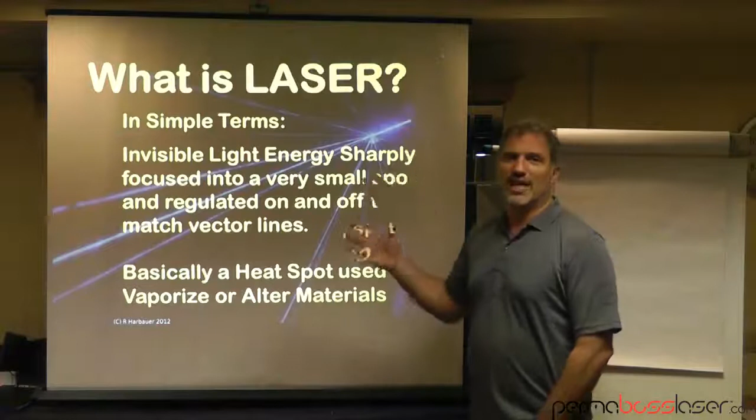In simple terms, laser is an invisible light energy that's focused and concentrated, and when it hits a surface, the energy is dissipated. It always follows vector lines—whatever you create in vectors is what it follows. For those new to the industry, vectors are the outlines, the shape of absolutely anything.

You can think of it as essentially a heat spot where you're focusing something tiny. The best example is if you ever took a magnifying glass and used the sun to focus on a newspaper, or some of you focused on ants—there's got to be one in the crowd who really burned a lot of ants.

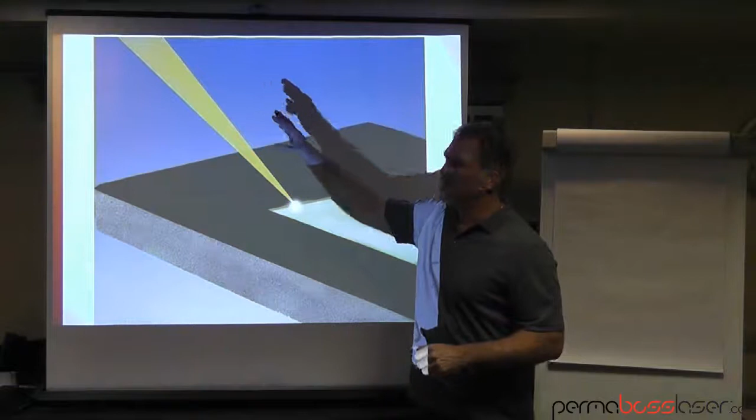Think of the beam—laser means light amplified, stimulated emitted radiation. The light coming from the ceiling or a projector is expanding out, but laser light is projected to be narrow, and then the lens you put it through makes it very sharp. When that light energy hits a surface, it essentially vaporizes it or makes it disappear.

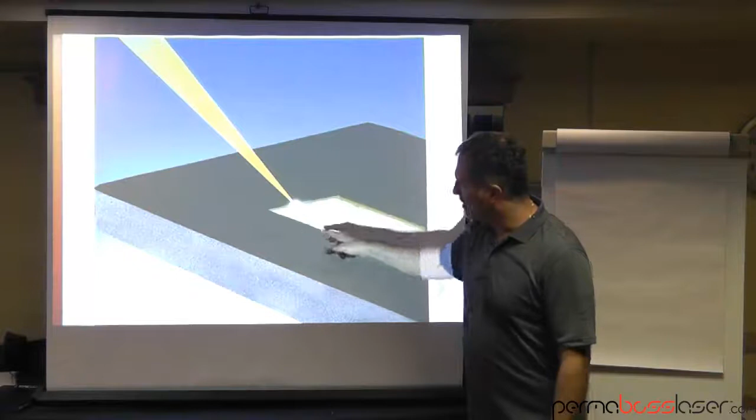In this case, you could be engraving and cutting out a shape, or taking off a surface layer. If it's something sensitive like textile, you burn right through it.

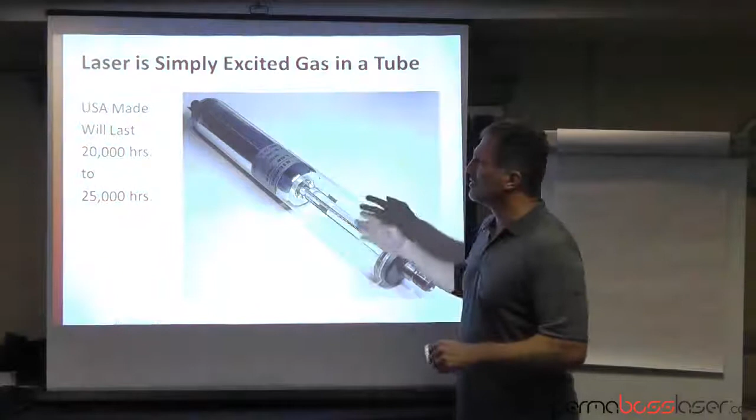If you want a visualization, think of a fluorescent tube in the ceiling light—laser is created a similar way, it's a type of gas. CO2 is the most common laser used for cutting in the textile industry.

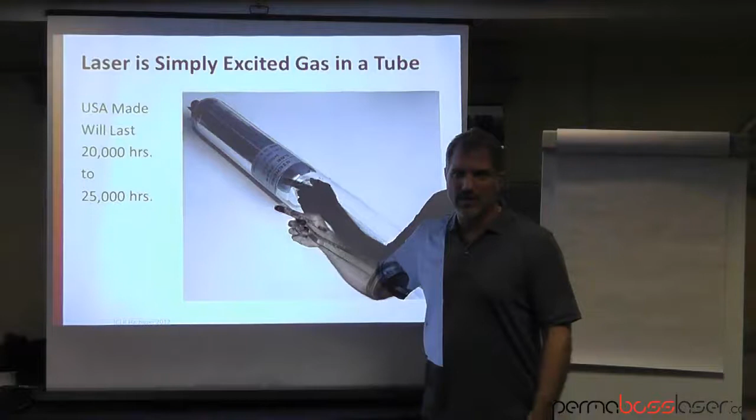If you buy a USA-made one, I don't know too many others in the world—the top ones, even in Europe, are being purchased out of the USA. They will last 20,000 to 25,000 hours.

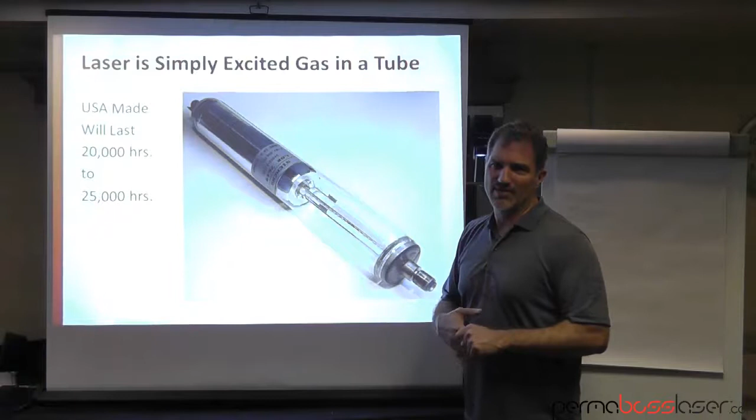In a textile-related business, that's somewhere between 4 and 7 years on average, because you might be zapping it for 2 seconds or 12 seconds times 12 pieces or 100 pieces. So it's the time the laser is on that you count as the time it's used.

In general, top quality lasers don't just die. The ones made in Asia are very inconsistent—the power fluctuation is very different, and they just die quickly and you have to replace them. Here, they're a lot more expensive, but they last a lot longer. They don't generally die, but they will fade away. So when you hit that 20,000 to 25,000 hour mark, you have to use more power, more time to get the same effect.

The three predominant laser makers in the United States and around the world, in no particular order, are Universal, out of Arizona; Coherent, which I believe is in the northeast of the United States; and Synrad, in Washington State.

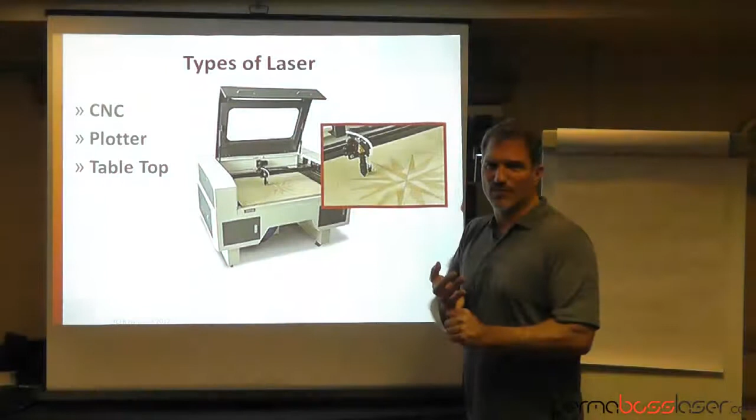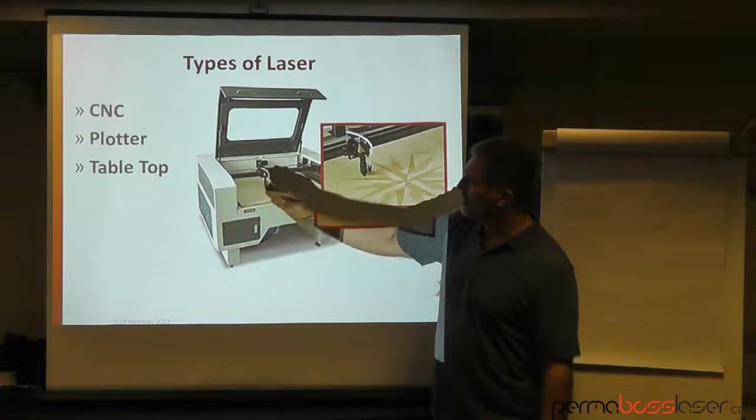The types of laser that are most common are CNC, which stands for computer numerically controlled plotter laser, which is a table moving along X and Y axes, also known as the tabletop. Here's a close-up—somewhere down here is the laser tube, and the laser light is reflected with mirrors up into this area called the gantry, and that device moves left and right and back and forth, which is the X and Y axes.

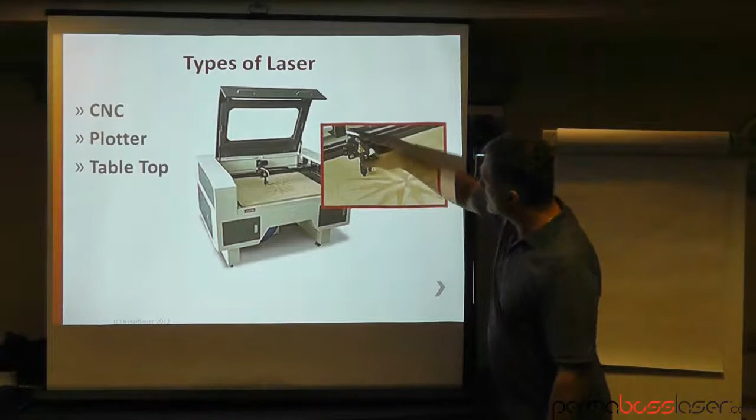Up close there's some sort of system to pump air to push the smoke away from the nozzle or lens so it doesn't coat it or cake it up, and then it's sucked away somewhere underneath on the sides, etc. This physical device moves.

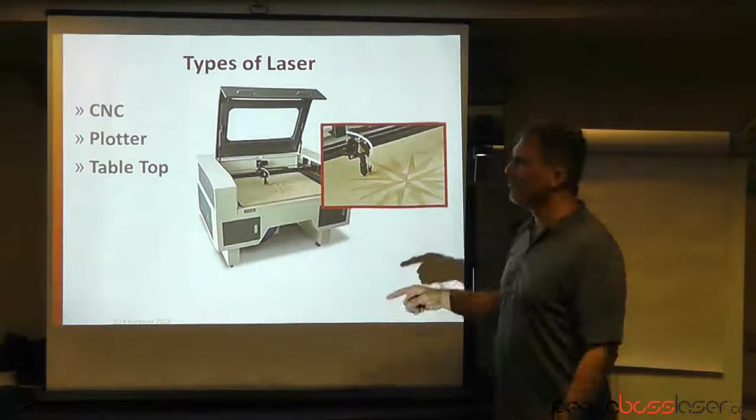The problem with some lasers—and I'm not being selective on any brand, but I hear it all the time at the shows—is that on a plotter type laser, quite often the further away you go from the source, the weaker the laser can be.

That should be like a design defect or a quality issue with mirrors and the quality of the laser beam. But in general, if it's a very big laser, the furthest extremity from wherever it's coming out is an issue because it's not as strong as on the right-hand side.

Here you see some sort of honeycomb type grill, and in general the air wants to be sucked down. One problem is if you have thick material, like wood, the smoke can't get around and hits the lens first, and that lens gets caked up. Think of yourself cooking eggs, and then cooking eggs again and again without ever cleaning the pan. Then you're cooking the cooked stuff, and that's what happens here.

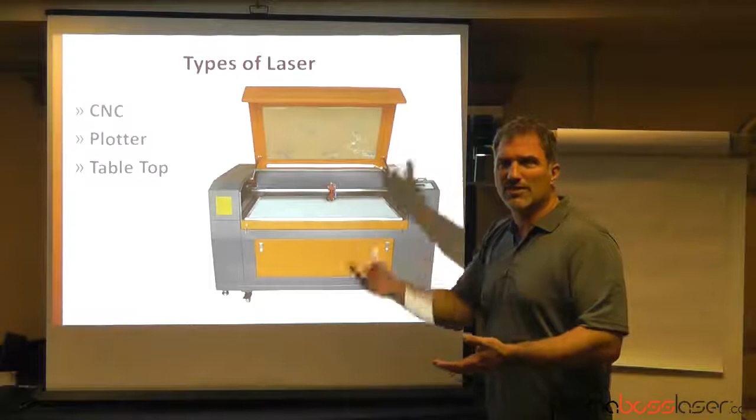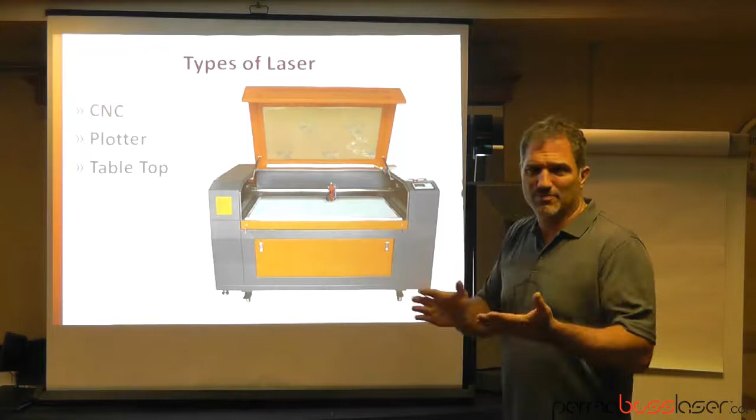This lens, often the size of a pencil eraser, is very small. The distance it is from the surface is maybe half an inch, and that gets plugged up. When that happens, you lose energy because it's being absorbed by the lens instead of the product, so the laser's effectiveness is reduced. Eventually you heat up the lens to the point where it can break or fracture, or it gets so full of cake from the burning that it can't be cleaned and has to be replaced.

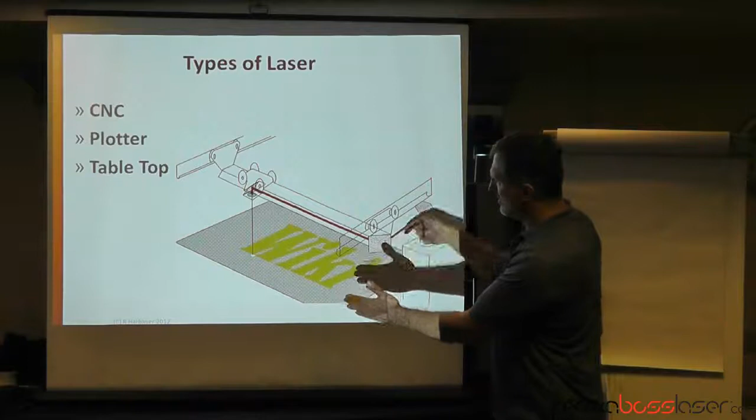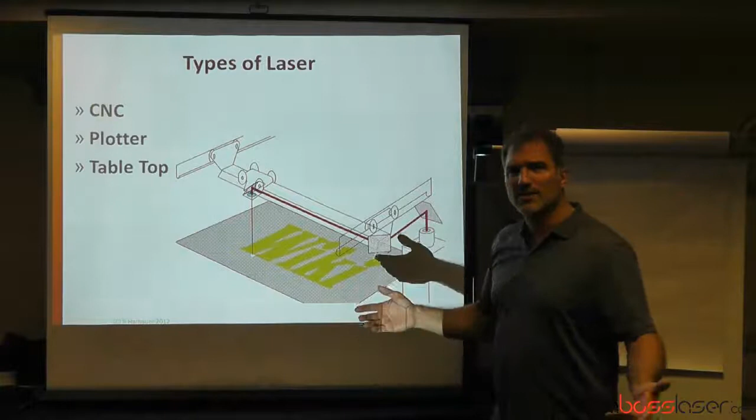So here on the side of the laser would be the laser source. It hits a mirror and is reflected out into the area. As this moves back and forth, the laser beam still hits that mirror and always goes in that direction, the x-axis. Then it's focused through a little lens, goes down, and cuts out the shape or etches it. The power of the laser determines what happens.

A higher power will vaporize more, a lower power will vaporize less, so you can scratch the surface or cut right through. You can go very fast with high power and make less damage, but it takes more passes to cut through, or you can go very slow with high power and get right through in one pass.

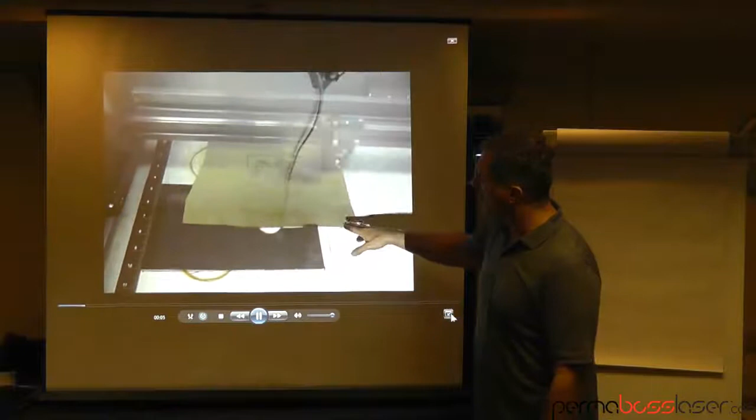I'm going to show a couple quick videos here from the web, from different companies, to show you the difference. Here you have a swatch of material in a flatbed plotter tabletop laser, and if you can see, it moves in a zigzag back and forth, only 1 millimeter at a time moving forward. So to do something like a left chest logo, like what's on my sleeve here, that might take 10 to 15 minutes.

So I'm talking here, and it's still going on. It was started when we went in there, so it's already been a few minutes. Can you just fast forward it and see how many minutes we have here? So let it go there.

Let's start it over. So it wasn't even - the portion I'm showing you was doing a small strip, maybe an inch strip, and it took a minute and a half to do that. It might be a 4 or 5 inch strip, I'm not exactly sure of the relative size, but that's one of the issues.

Notice here, it's a minute and a half for a swatch of material on a plotter laser. It's very difficult to take a jacket, fold it, get it into position, lay it in, know where to place it, and line it up so it's directly along a seam in a very specific spot, or exactly on the collar or the yoke. That's the challenge when you have a plotter laser.

So even with a big plotter laser, you only have this little surface distance between the lens and the work area, so it's quite challenging to line that up. People have tried - sometimes they're able to get their hoop in there, but with the hoop in the bottom of the shirt there's a cavity, so you might be too far away, and you have to adjust the lens.

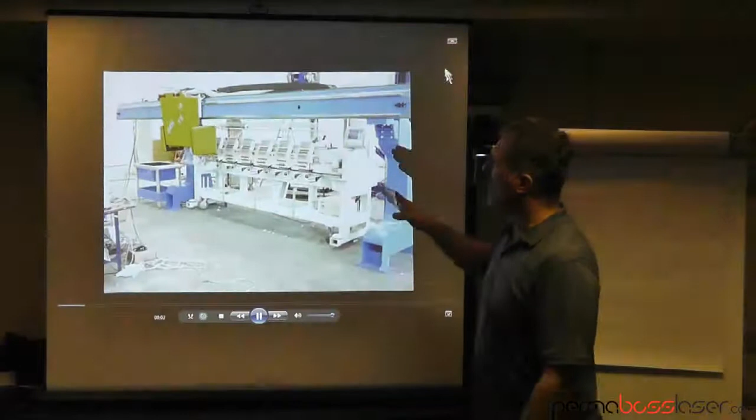A bridge laser is the extreme of the technology. I'll go into how they work a little bit later. What you've got here is a structure, a very large structure, and the whole yellow laser moves along mechanically.

So it's complex. You're talking no less than $150,000 on average, $180,000 plus your container, your setup, your delivery, moving your equipment out, getting it installed, putting it above. So there's often a week or two process based on the size of the laser.

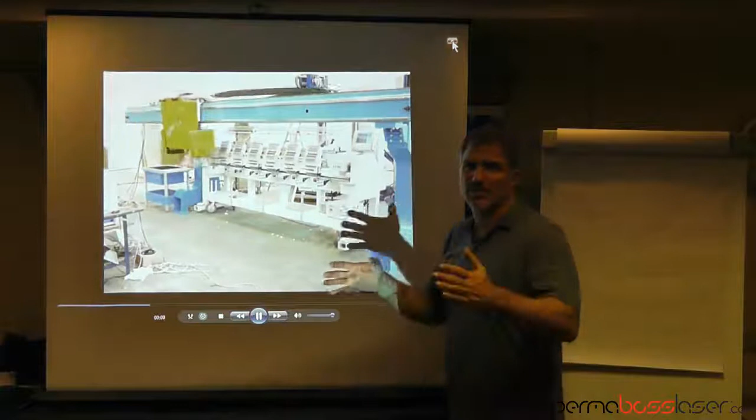The advantage is that you can register this laser to exactly that destination. So your embroidery hoop 1 has a 0,0, your embroidery hoop 2 has a 0,0, but it's a little bit different than head 1, etc. So this laser you can accommodate to match the embroidery machine's mechanical fault, because every embroidery machine is different. You can't take out a design of head 1, put it in head 3, take head 3 and put it in 5, and 5 and 2, halfway through and continue, because it won't line up. So the bridge laser compensates for that.

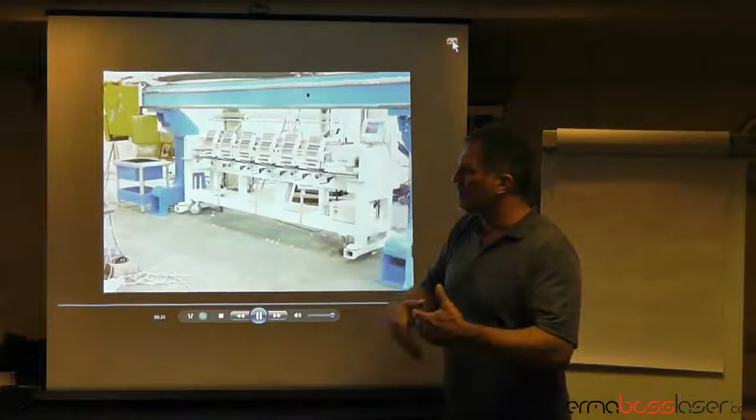The challenge with it is that it doesn't shoot out a visual beam. You just see the result. You can't aim. And the table where you would etch is not set up to be conducive to high productivity for just etching services. But it's a valid technology.

So here I'll give you a couple different examples of something different. When you can have a visual before you actually shoot the laser, you can see where you're going to shoot and register something. You can also put a collar in there, visually see where it's going to go, and then exactly line it up, and that's difficult to do with any kind of laser unless you have some sort of physical visual. Or you can do the placket where the zipper is, etc., and get it right along the spot.

Here's an example when you have a visual. This person's doing leather chamois for cleaning cars, and they've basically sprayed stick glue down from the screen printing industry. The chamois sticks there. They throw the product on because they have a visual that they're looking at. You can't see it in the video, and then they hit the button, laser it, and there's turnover. If you watch the video, it says up to 210 pieces per hour.

That's a big number, and that's what you can do in America and in Europe to have a big productivity range. So it's just a lot of video, but I guess they're proving that by staying at that speed to time it out, and see what else is right at the end here.

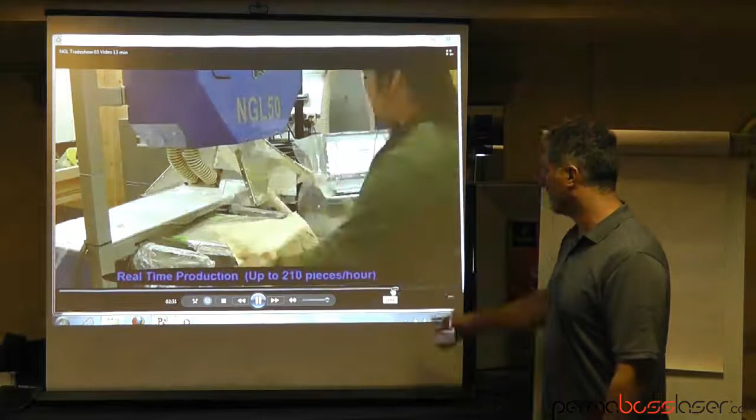So now you're actually doing a finished garment like a hoodie or sweatshirt in the hoop of an embroidery machine. There's nothing exciting about a needle moving. But once that's done, you take out the hoop and literally plug it into the laser. This is an alternative to the bridge technically. You have the same hooping arms as on your embroidery machine. Oops, we just missed it. Okay, so just go to the next video.

And as you tear it away, you end up having a distressed look on the garment. So it's kind of interesting to do that. And remember, the big thing is that it's off the embroidery machine. The stitch count is low. It's off the laser, away.

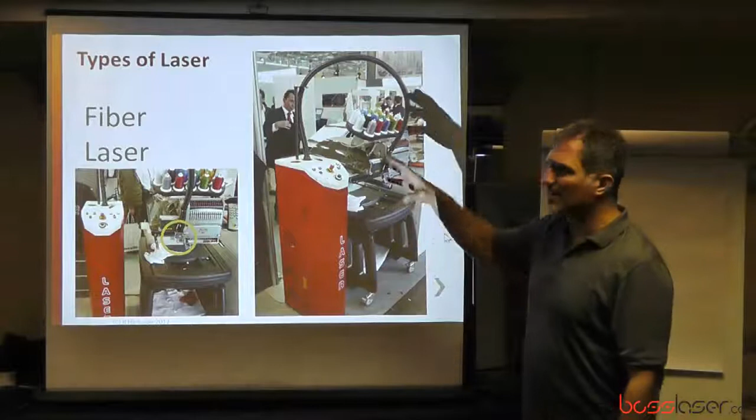So here's a couple different lasers. I did the tabletop CNC plotter laser. This is technically known as a single head or a fiber laser. What you're doing is you have the laser tube that basically fires at full power through a fiber optic.

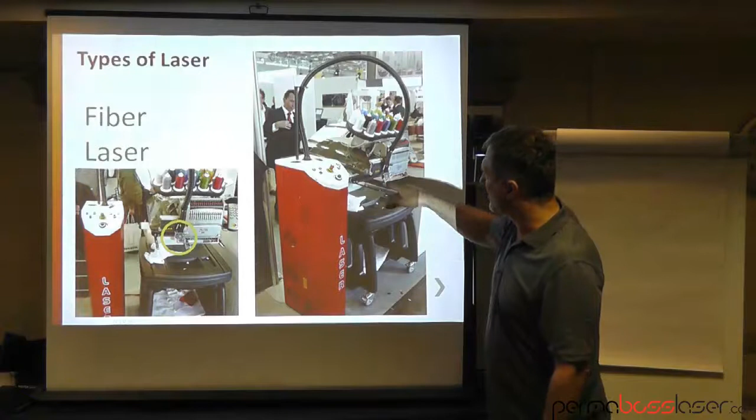And that larger tube often is the device that's sucking the smoke away, or attempting to suck the smoke away, and you're firing the laser, which is being activated by the activity of needle 1. So as needle 1 is moving at a high rate of speed, that's the trigger to turn on the laser, and that happens in this area here.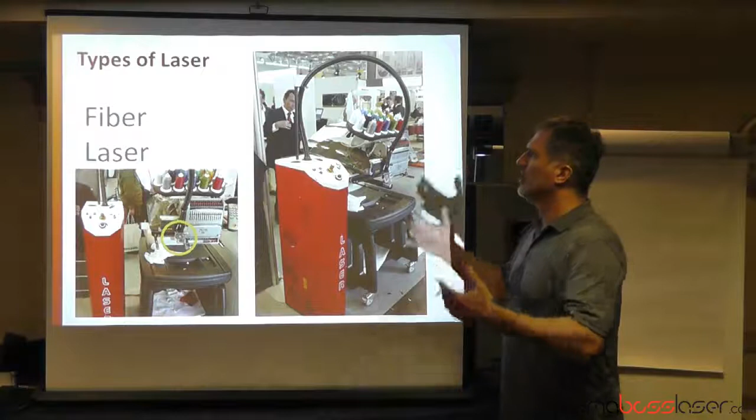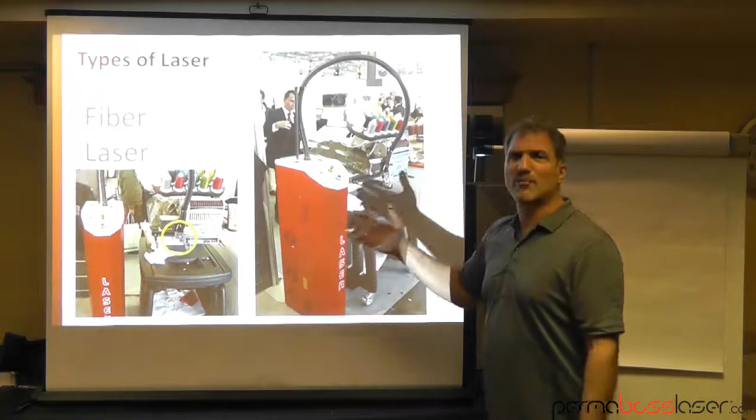So it's just a more cost-effective laser. In the industry, it's known that the average output for applique, reverse applique, is somewhere in the neighborhood of 4 to 5 applique per hour. So if you're in a retail environment where you can make a 30 quid profit, that's 30 pounds sterling, or you can make a $40, $50 profit, then it's worthwhile for sure to have that laser to do that.

So a scanning laser is the technology that's at the upper scale. It's the component that the bridge lasers use, and the main idea is that the laser is attached mechanically, sending the light beam of the laser beam into the scanner head, and I'm representing it in red always so you can see it on a presentation.

And this scanner head has a set of mirrors in there that are wiggling to make the movement. So you're shooting out here onto the surface.

Here's a representation of mechanically what's happening. You have a laser entering from some location, and there's a mirror on a motor, and as it hits here, it gives you, let's say, the X direction, and if it hits the other mirror, it gives you the Y direction. So the combination of them together will make the movement. And then it always has to go through some sort of fixed focal length lens, and that device on a Galvo laser can be the size of a Coke bottle, or a Coke can, etc.

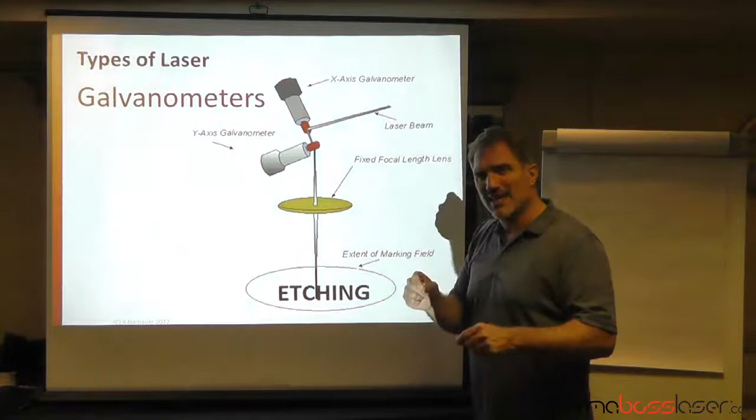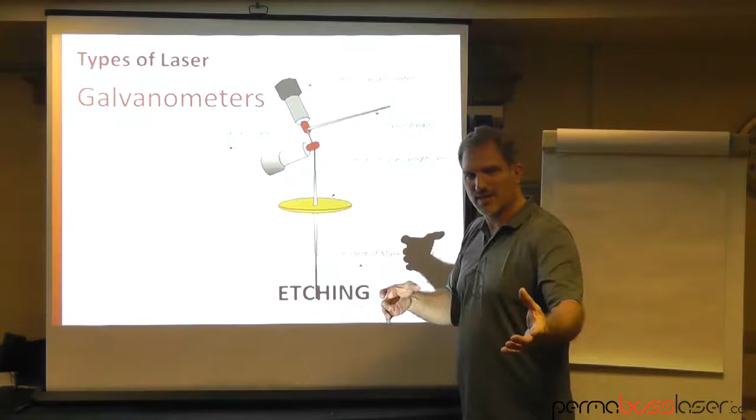What that does is it takes the fatness of the laser and focuses it into a narrow point. So when it's at an extreme, in a corner or edge of the working area radius, it stays a fine point. A good example: if you aim a flashlight straight down at the floor, you get a perfect circle, but if you aim it at an angle, the circle turns into an oval. You familiar with that? Good, I want a lot of nodding heads here. When that happens, you're changing the energy because it's spread over a larger area. This lens prevents that from happening, and it's built into the scanner head. It's nothing you have to worry about as a laser owner - that's taken care of by the laser manufacturer.

What's interesting is that on a scanning laser, there's a great distance from the surface to where it's coming out. On a plotter laser it's like this, on a fiber laser it's like that, but on a scanning laser it's a big distance. So if your lens is this big and you think about the beam coming out, it's a long, narrow focal beam. Sometimes your product can be a little higher, lower, crooked, or bumpy, and it's not affected by the laser - so you get a quicker setup without investing so much time to set it up perfectly.

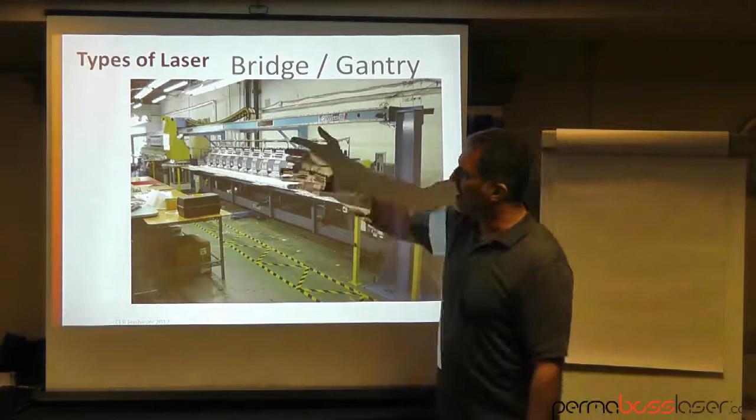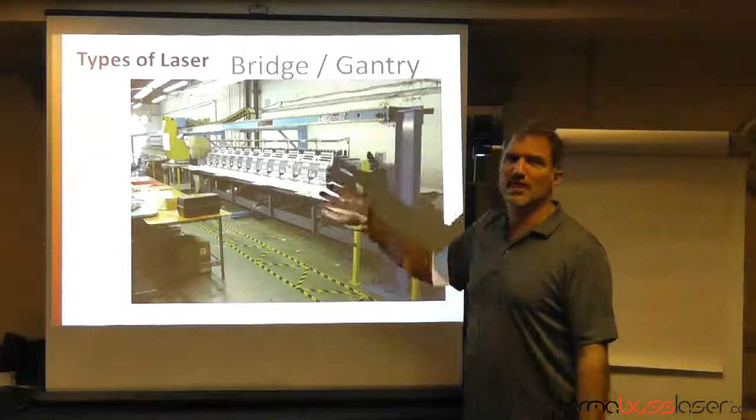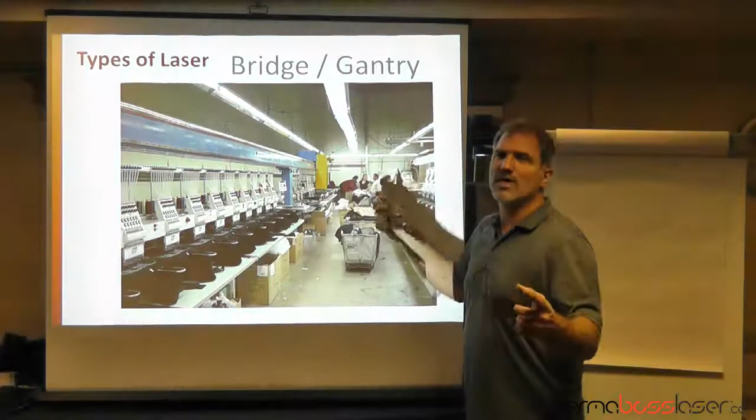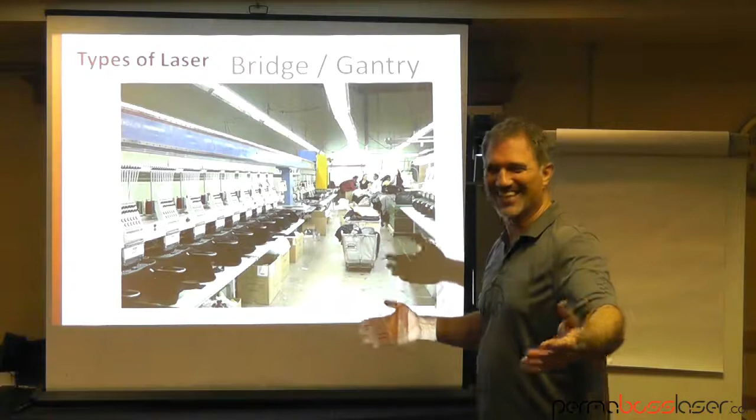Here's a picture of a laser that's probably 65 to 70 feet long, with multiple 12 or 18 head machines underneath it. It's justified to make that expenditure because these are factories with 300, 200, 600 heads of embroidery. Here's another angle - this one is from New York that I was involved in installing years ago, and it's the longest laser in the world, over 96 feet long, with 3 twelve-heads, a two-head, and a six-head all underneath one structure. Imagine it's like 3 times the length of this room here.

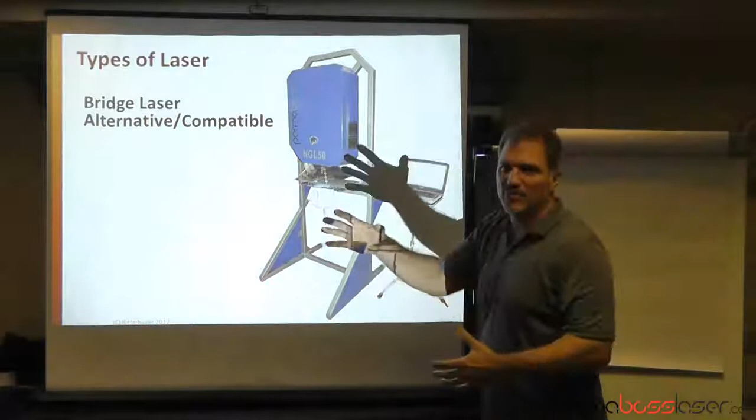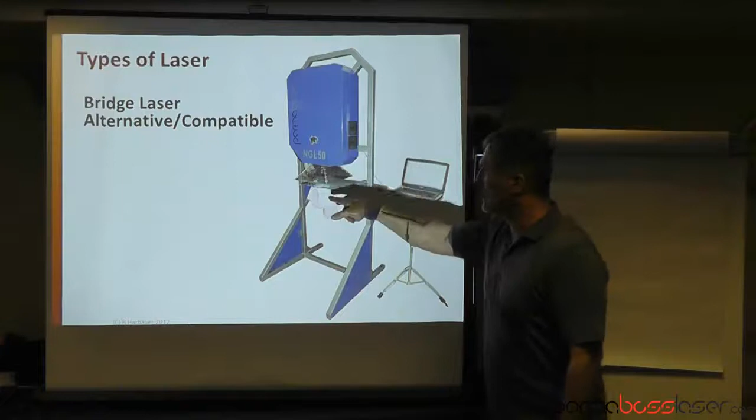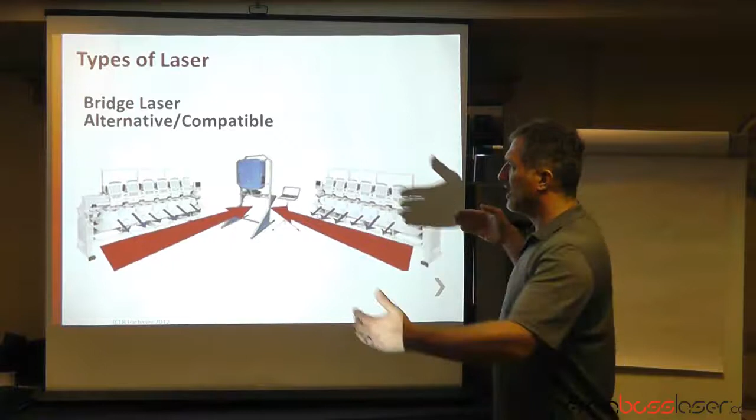Let's just say long, right? So this is a standalone laser - a combination scanning laser without the bridge. The concept is if you have a 6 head here and a 6 head here, you can take out the embroidery heads and plug them into the hoops, and the laser is in harmony with the embroidery machine - it knows it came from head 1, head 2, head 3, head 4, head 5, head 6, machine A, machine B. So it does the same thing the bridge does, and you can put machines on either side - it's like a telephone booth concept. So that's all the different lasers available out there.

Now this is a bit of a tongue twister. The things in red, I'll read them out for people at the back, and I'll read them out for people watching the video. What can you decorate with laser?

Anything CO2 is unique because there's a huge variety of stuff. When you typically buy a laser for embroidery textile decoration, its strength is not to do tiny carabiner pens and little trinkets and things like that. That's best left to, like, a $6,000 tabletop laser, and that's a different business because the margin needs to be in volume, and that's not typically what I'm referring to or what this seminar is about. It's about doing textiles, optimized for that decoration.

However, there's a lot of things you can do on the side, so I'll list them off. Everything in red: cotton, felt, leather, micro fleece, micro dry which is dry wicking, also known as performance wear, polar fleece, micro fleece, polyester, tackle twill, and wool.

In the UK I got a lot of questions, and nobody's really familiar with tackle twill here. There's a great company in the USA called Twill USA, and they carry all kinds of twills, they ship everywhere in the world. Tackle twill is a material that represents embroidery fill, and it comes in all the thread colors you can imagine. So instead of actually sewing out a whole area and creating the weight and the bulk, you can replace it with tackle twill. It's the same stuff they use in North America on all the hockey jerseys and football jerseys. It's a strong material that looks like full stitch out, and you attach it with running stitch, zigzag stitch, or satin stitch. So that's interesting.

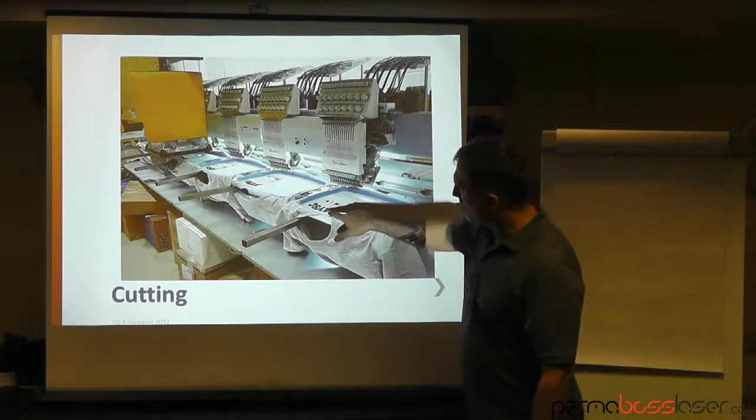Go ahead. So here's an example of the process with a bridge laser where you've got a finished garment and you've got the blue felt, and on top of that you've got the beige. Here the beige has been cut, but it hasn't been peeled away, and I think the next step walks you through the process. So you've got a hoodie with a zipper here.

On the left-hand side of the chest, you've laid down a big chunk of felt, but you've put down the foil first, and I'll get to that in a minute. The foil prevents the laser from wrecking the garment underneath, and now you've done a running stitch, and the laser has cut over it, and you're peeling the excess away, and you'll peel the foil away in just a second. Go ahead. So now the foil is being pulled away.

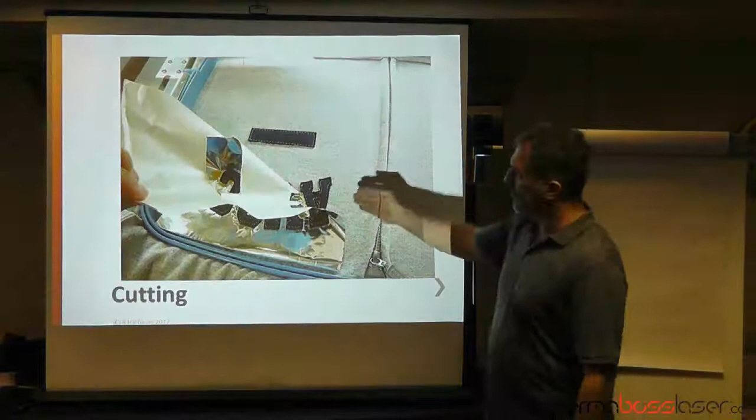Come on, we need to turn over here. People are going to fall asleep at home.

Now you've got a bit of the foil that's remaining here. You can clean that out. It's a bit of evidence.

And the next thing is you lay down another piece of foil and you put the beige on top. The reason you have to do it in this design, which you'll see in a second, is because you've got overlapping - you're putting the beige directly over top. If they're not overlapping, you could almost never have that issue, you could have put them down at the same time. There's some samples out there, like the Subway sample, etc., that I can show you afterwards where you've done that. So here's the remaining pieces that's left over from the cut. Go ahead.

I've pulled off the foil now. This is an example right here of how you know when to use foil and when not to. I'm getting a suntan every time I walk in here.

When you have a dollar store pointer laser, just a $2 laser, what you do is poke it against the shirt, the product you want to laser cut. If the laser comes out the other side, then you need to use foil because the light can get through. If you hold the material up to the light and you can see light come through, the laser is smaller than a pin. It'll go through that little speck and cause damage on the other side.

So here I've got another material, I'm shining the laser through, and I can see the dot exposed below. I'm shining it from the bottom up, and I can see the dot. It's not black, it's not plastic, it's not solid. That means the laser light's going through, which means you're going to have to use foil.

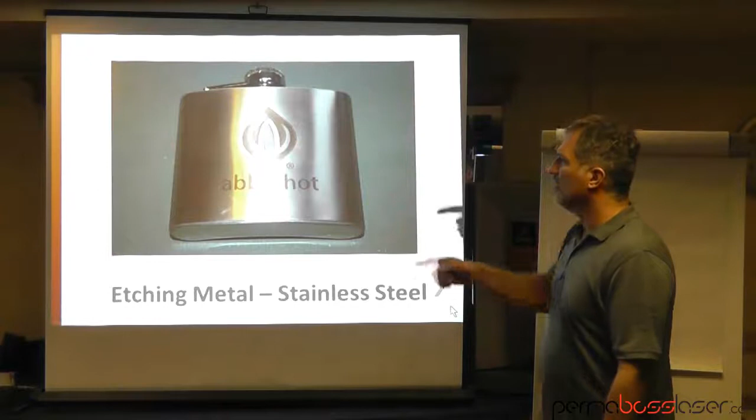This is a flask, stainless steel, and it was treated with a spray, and that spray reacts with the laser to create blackness, and you wipe it off with water, a sponge, etc.

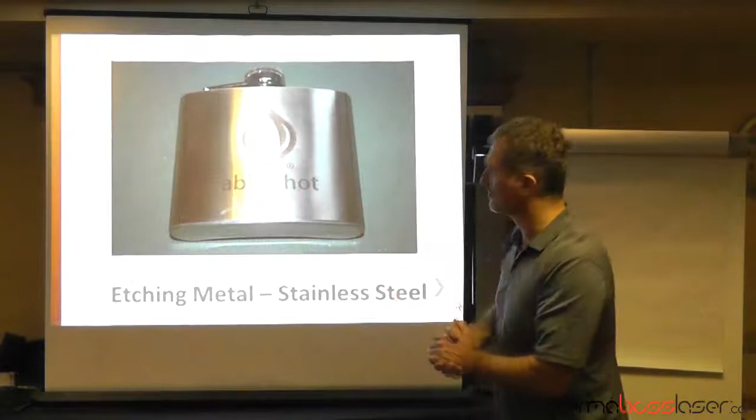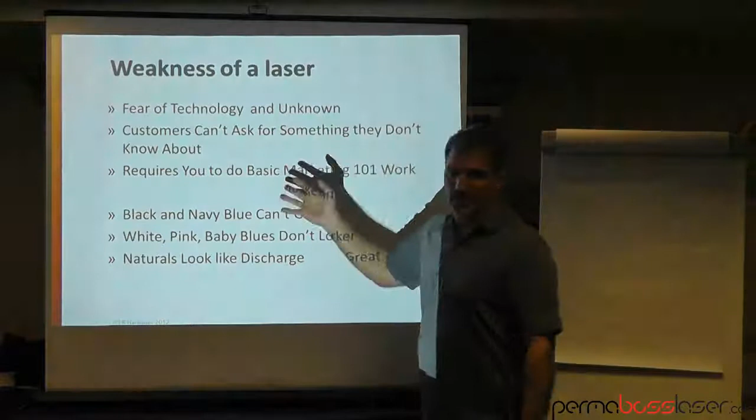So the weakness of the laser and the laser user is fear of the technology, the unknown. People are terrified. They have to meet certain safety standards or else they can't be on the market, so that's pretty much taken care of. The supplier will teach you how to avoid stuff, how to take care of it, how to maintain it. And the word laser is a little bit like car, right, because it's so versatile. Typically the laser is the tube inside the machine, but we refer to the whole machine as my laser. The big problem is customers can't ask for something they don't know anything about.

That's your fault for you not educating your client. That's you being too busy with existing clients and not sending something out. It requires you to do basic marketing 101 work. If they don't know, look in the mirror, because you're not doing the job that you need to make them aware. And it's as simple as making a sample, getting it out to your best customers. If you've got 10 or 15 customers that are great, then send it out once a month to those 10 or 15 customers that are really great.

With regards to etching, a negative is that black synthetic product doesn't get darker. But you've seen, if you've been by my booth, you can etch black and it does show a shade, a very subtle decoration. You can do navy blue and it almost comes out black. But synthetics don't get darker. You can't take a white, a pink, or a baby blue synthetic and make it lighter.

Naturals, remember, look like discharge. So a black, navy blue, or red t-shirt gets the color taken out. When you wash it, it has a grayness, like it was bleached exactly to the logo.

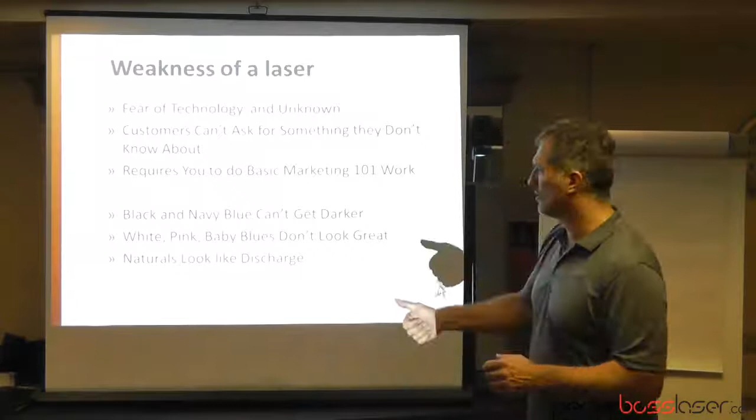Strengths of a laser: we live in an iPhone, internet age. We need information instantaneously. Embroidery has been the same technology for the last 40 years. It hasn't changed, it's still sewing. It's quieter, it's faster, but it's still stitching. When you add a laser in harmony with your embroidery machine, you're basically taking your embroidery completely out of the industrial age.

So you can take an old 1986 or 1999 machine with, say, 5 colors. In all the designs we went through in the examples here, they're basically 2 or 3 colors - a bit of running stitch, zigzag stitch, tack down stitch, contrast stitch, but not 9 or 10 colors. So you take old equipment and completely revitalize it.

You drastically reduce stitch count. When you lower stitch count, you get more turnover per hour. So your increased turnover on average in existing embroidery is 4 to 6 times more. Why? Because if an average left chest logo takes 5,000 to 8,000 stitches, you can only do so many pieces per hour, which limits you to that North American standard of $35 to $45 per hour.

That's not my number - that's from the banks and leasing companies looking at the financials when they're financing the equipment, telling us these people don't earn more than that, we can't give them more money. That's not my statistic, by the way.

When you have a laser and less stitch count, you have less wear and tear because there's less motion, less movement, less mechanical stuff on your embroidery machine. And because it's at the infancy stage, working towards critical mass, getting in the market now means you'll be on the rise. Embroidery is at capacity, at saturation - there's always somebody who can do it for less than you, and somebody who can do it for less than them. So there's little competition, but you have to make your customers aware.

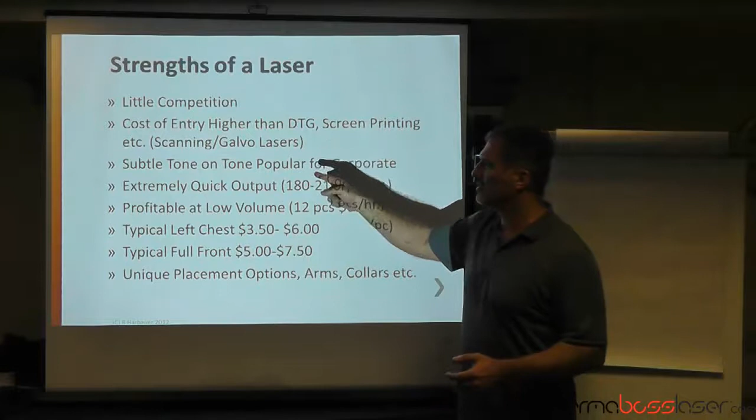So the summary is very little competition. The cost of entry is higher than DTG or screen printing when you get a scanning or Galvo laser, but your margins are also way, way higher with less competition. It's subtle, tone on tone. It's popular for corporations - if you look at many of you in the embroidery business, a lot of the stuff you do on a black shirt for Coca-Cola is a gray Coca-Cola, not red and white anymore, okay?

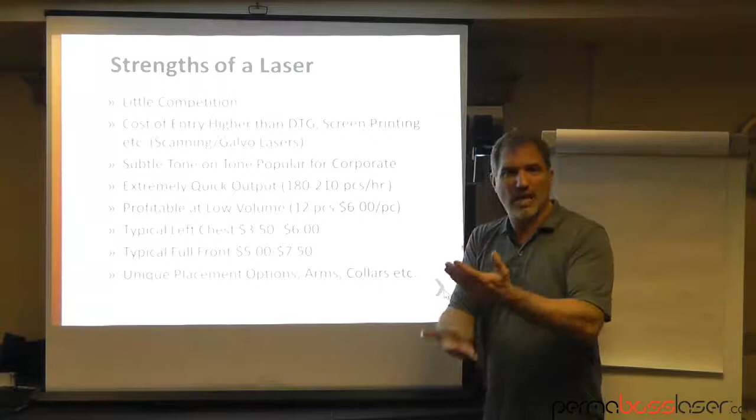Extremely quick output - with no stitches, you're hitting 180, 210 pieces per hour. It's very profitable because at low volume you can do 12 pieces, but when you get $6 a piece, $5 a piece, and it takes 7 minutes - we've got video and samples and demos where you'll do 4 pieces in a minute, blindfolded practically. I'm joking about the blindfolded, but you'll hit that number. So at that volume you're getting $6, and you can do a 12-piece order and in 10 minutes be completely finished, from digitizing to output, done.

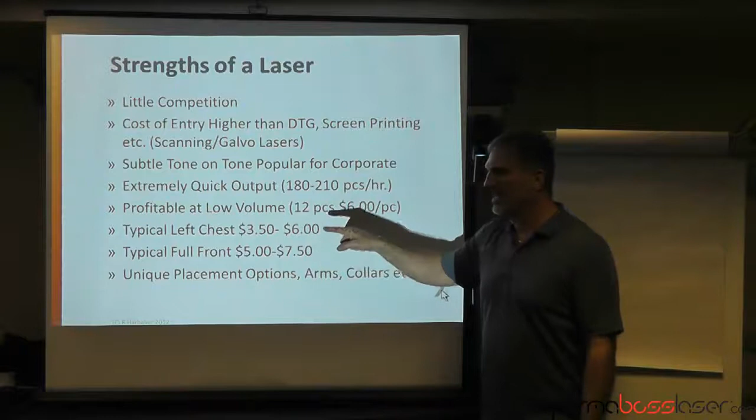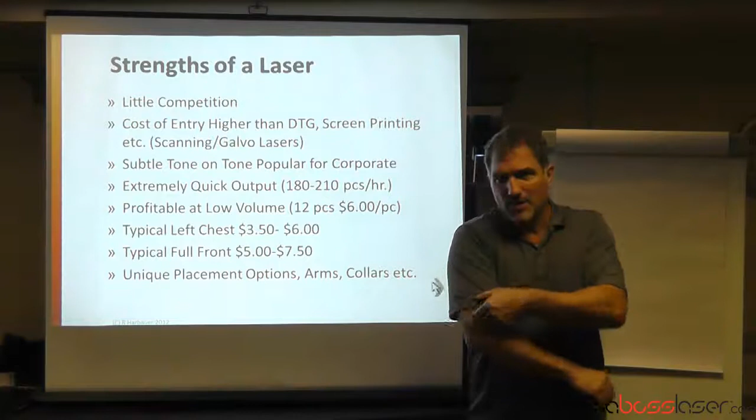Unique placement options - you can do arms, collars, yokes, plackets, the little fine area below the seams, all that. You can do it on the inside. You can label on the inside of every shirt that goes out, so every product has your brand showing where it was decorated by, right?